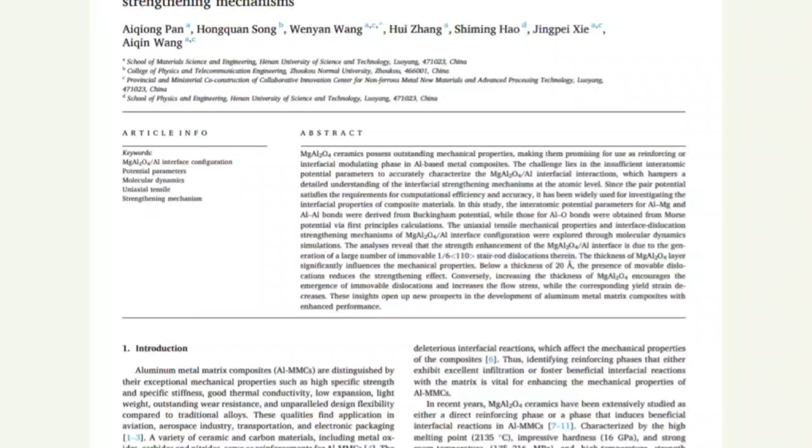Assalamualaikum. My name is Mio Sazman bin Yusuful Bahrim, and today I will be presenting a study titled Interatomic Potential of the Magnesium Aluminate-Aluminium Interface and its Application in Strengthening Mechanisms.

Let me begin by introducing the background of this study. Aluminium is widely used in aerospace, automotive, and structural applications because of its lightweight and good conductivity. However, its mechanical strength is limited, especially when subjected to stress and deformations. To overcome this, ceramic materials like magnesium aluminate are added to aluminum to form metal matrix composites. Magnesium aluminate is known for its high hardness, thermal stability, and low density, making it an ideal reinforcement.

When combined, the interface between magnesium aluminate and aluminum becomes of critical importance because it governs how stress is transferred, how dislocations move, and ultimately how strong the composite becomes. However, despite knowing that magnesium aluminate improves the composite's properties, the atomic scale mechanism at the interface remains poorly understood. That's why this study used computational simulations to investigate how atoms behave at the interface, especially during mechanical loading.

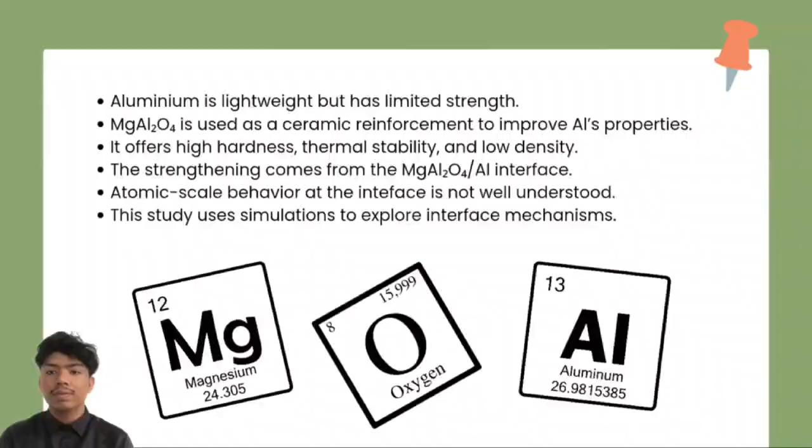One of the central challenges in developing stronger aluminum-based metal matrix composites lies in understanding how the interface between the metal and the ceramic reinforcement behaves at the atomic scale. In this study, the focus is on the interface between magnesium aluminate and aluminum. It is already known that adding magnesium aluminate improves the mechanical properties of aluminum, such as increasing its strength and stiffness. However, the exact mechanisms by which this strengthening occurs, especially the role of atomic interactions and dislocations at the interface, are not fully understood.

Studying this interaction requires molecular dynamics simulations, which can handle large atomic systems and simulate deformation behavior. But MD simulations depend heavily on accurate interatomic potentials, mathematical models that describe how atoms interact. Without this, any simulation results will be unreliable. While first principle DFT-based methods can produce highly accurate interatomic data, they are too computationally intensive to apply directly in large scale MD simulations. On the other hand, MD is efficient but lacks accuracy unless supported by fitted interatomic potentials.

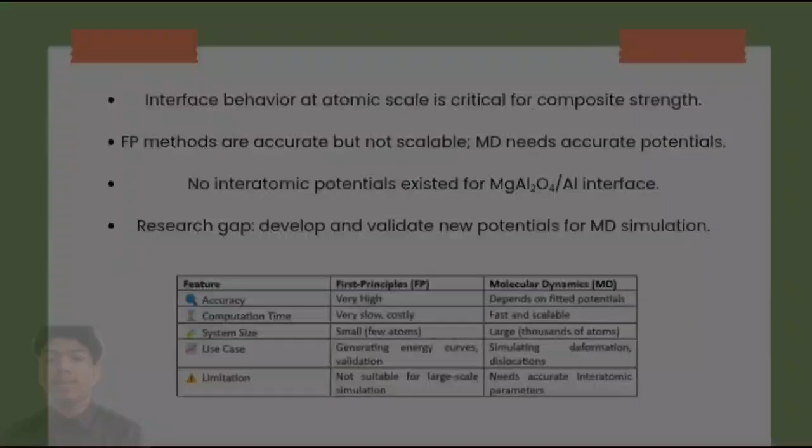This study aims to address a key limitation in simulating the magnesium aluminate-aluminum interface: the absence of validated interatomic potential models. The primary objective is to develop a set of accurate, efficient, and practical potential parameters that can be used in large-scale molecular dynamics simulations. To achieve this, the first goal is to generate new interatomic potentials for aluminum-oxygen, aluminum-magnesium and aluminum-aluminum interactions. These are derived by fitting classical potential functions, specifically the Morse and Buckingham models, to high accuracy energy curves calculated from first principle methods.

Once the potentials are fitted, the next objective is to validate their accuracy by comparing them to the FP results. This step ensures the fitted models accurately represent the real atomic interactions. Finally, the validated potentials are applied in MD simulations to study mechanical behaviors of the interface. The simulation aims to uncover how the interface responds under tensile loading, how dislocations form and evolve, and how the thickness of the magnesium aluminate ceramic layer affects the composite's mechanical performance. These objectives collectively support the broader goals of revealing atomic scale strengthening mechanisms and improving the design of high-performance aluminum composites.

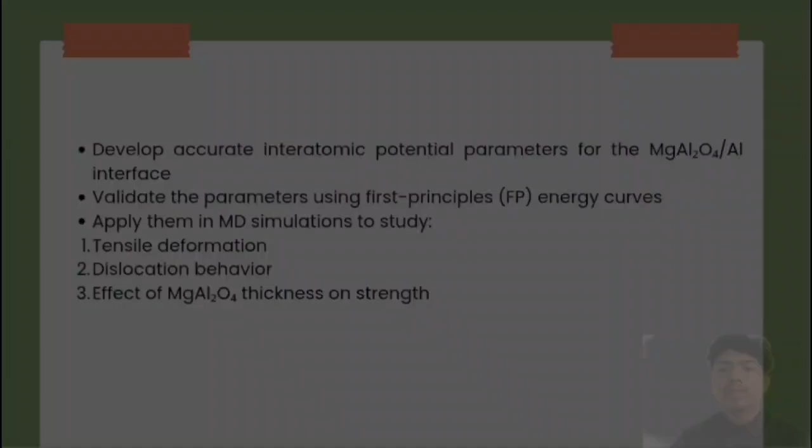In this study, a multi-step computational methodology was applied to investigate the atomic scale strengthening mechanism at the magnesium aluminate-aluminum interface. The process begins with first principle calculations to generate accurate energy-distance curves for the atomic interactions, especially aluminum-oxygen, aluminum-magnesium, and aluminum-aluminum. These curves were essential for understanding how atoms interact across the interface. Next, these curves were used to fit the interatomic potential functions for use in molecular dynamics simulations.

The Morse potential was applied to the aluminum-oxygen interactions due to their strong and partially ionic nature, while the Buckingham potential was used for aluminum-magnesium and aluminum-aluminum interactions, which are more metallic and repulsive, with the fitted potential parameters.

The research team constructed 5 different interface models, each with a different thickness of the magnesium aluminate layer: 10 angstrom, 20 angstrom, 28 angstrom, 36 angstrom, and 44 angstrom, referred to as T10 to T44. Following this, molecular dynamics simulations were carried out using the LAMMPS software package.

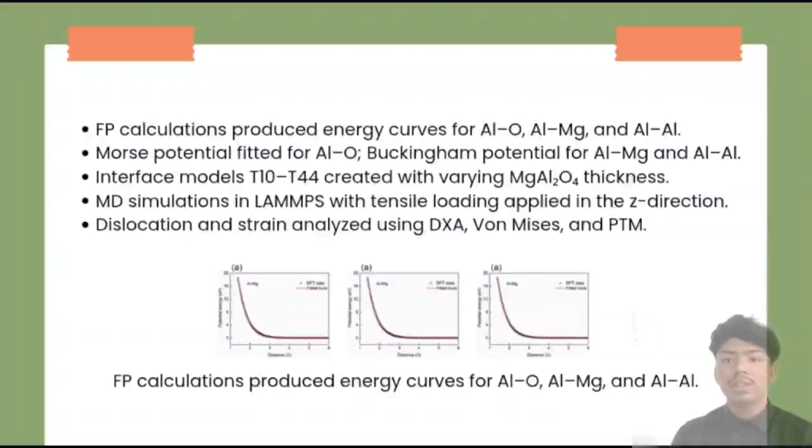The first results from this study involve verifying the accuracy of the fitted interatomic potentials. Figure 1 compares the first-principles DFT data with the fitted energy curves for 3 atomic interactions: aluminum-magnesium, aluminum-aluminum, and aluminum-oxygen. For aluminum-magnesium and aluminum-aluminum, the fitted Buckingham potential curves closely match the DFT reference, capturing the correct repulsive behavior at short distance and decay at longer range.

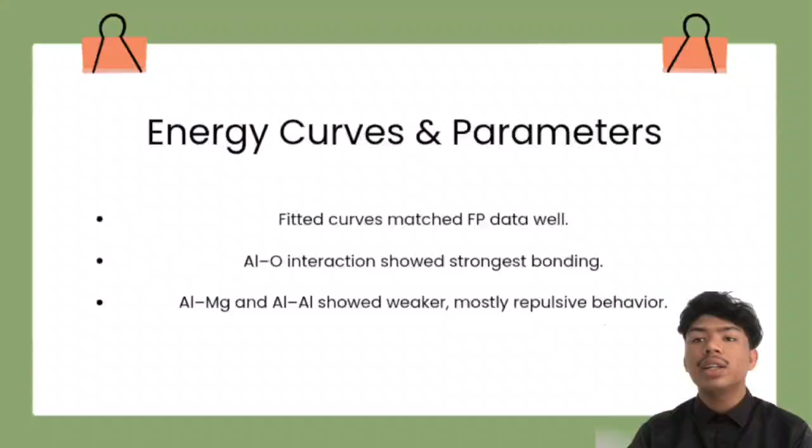For aluminum-oxygen, the Morse potential was used, as this interaction is strong and partially ionic. The Morse fit accurately followed the deep energy well of the DFT curve, indicating strong bonding. The successful fitting validates that the chosen potentials represent real atomic behavior accurately. These validated parameters are then used in all subsequent molecular dynamics simulations.

Next, the mechanical strengthening effects were evaluated through tensile tests in MD simulations. The results show that adding a magnesium aluminate layer significantly increased the material's flow stress. Among all models, T28, in which a 28 angstrom thick ceramic layer is used, produces the highest flow stress, showing a 203% increase compared to pure aluminum.

The atomic-scale mechanism behind this strengthening was explored using dislocation analysis. Simulations revealed that stair-rod dislocations formed at the interface. This dislocation is immobile and acts as a strong barrier blocking further dislocation movement across the interface. This is what causes the observed strengthening. Thus, the combination of thickness and dislocation blocking effects explains the improvement in mechanical performance.

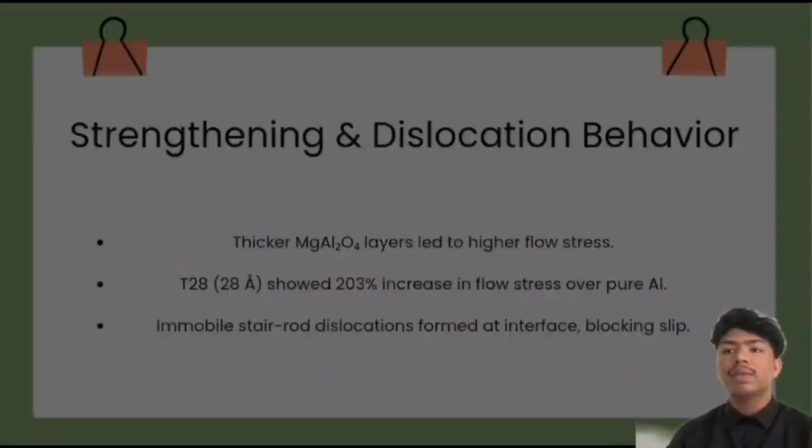In this part of the study, the effect of the magnesium aluminate layer thickness on mechanical behavior was investigated using the 5 interface models. T10, T20, T28, T36 and T44 represent increasing ceramic thickness. The results show that T10 and T20, with thinner magnesium aluminate layers, allow more dislocation motion across the interface. This leads to lower strength but higher ductility.

On the other hand, T28, T36 and T44 show higher flow stress, meaning stronger materials. However, they also show reduced plastic deformation, indicating a trade-off. The T28 model gives the best balance. It achieves the highest flow stress with a manageable amount of ductility.

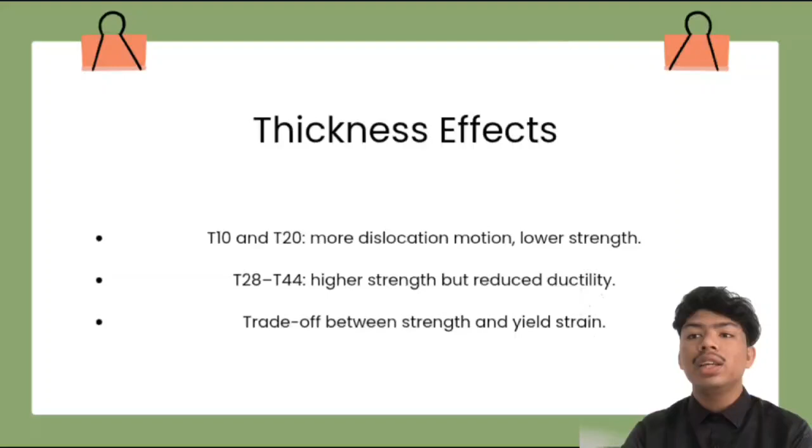This highlights that interface thickness is a key design factor. Thinner layers improve ductility but reduce strength, while thicker layers increase strength but limit deformation. Designers must choose the right thickness based on whether strength or flexibility is more important.

In conclusion, this study successfully developed and validated new interatomic potential parameters for the magnesium aluminate-aluminum interface. By fitting Morse and Buckingham potentials to first-principles energy data and applying them in large-scale LAMMPS molecular dynamics simulations, the team was able to realistically simulate mechanical deformation and dislocation behavior at the atomic level.

The simulations revealed that, first, magnesium aluminate layers increase flow stress by impeding dislocation motion. Second, the T28 model with 28 angstrom thickness provides the most effective balance of strength and ductility. Third, the formation of immobile stair-rod dislocations at the interface is a key strengthening mechanism.

Overall, the research provides valuable insight into atomic-scale strengthening mechanisms and offers a validated simulation framework for designing high-performance aluminum composites reinforced with ceramics like magnesium aluminate.